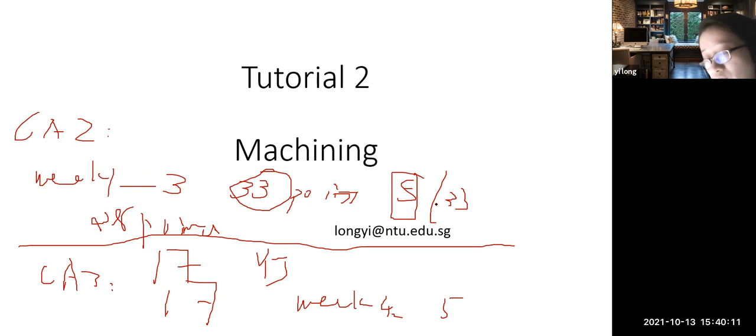Also, the other thing you have to keep in mind is don't skip any of these CAs, because no matter what, even if you're under quarantine, we still have to give you makeup. Even if you have an MC, you still need a mask, no matter what. This is a school new policy — not like before where with an MC the marks could be proportional. Not anymore, starting from this year.

Clear? Okay, so let me move on. Again, to emphasize: CA2 covers week 1 to week 3, basically until today. Also, 5 points were already given to you if you finished the LAMS sequence. And CA3 only covers the last 2 weeks, week 4 and 5.

Also, Eugene's part is going to have another half, but for what content he needs to test you, please double confirm with Prof. Yu. Clear? Okay, my part is very simple: CA2 is week 1 to 3, CA3 is week 4 and 5. Clear.

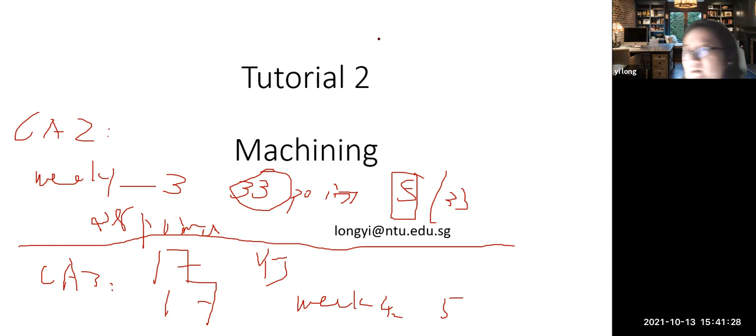Just one last message: don't skip it, there's no point. Okay, what are the operations — turning, milling, and drilling — and what machine can be used for feature 1 to 4?

So you can see, for feature 1, I just make this one's diameter become smaller; for feature 2, I make this flat surface; and I drill a hole here, and cut off to form this, starting from 200 millimeter down to 150.

Okay, so let's quickly review what we have learned. The outline for this whole course: machine introduction, so traditional material removal. We've very much focused on turning, but turning, drilling, and milling are among the most common operations here.

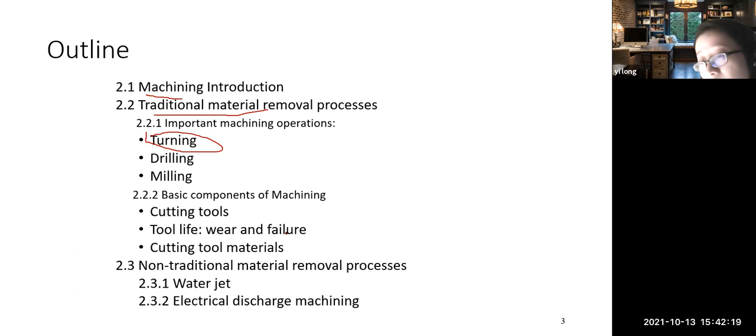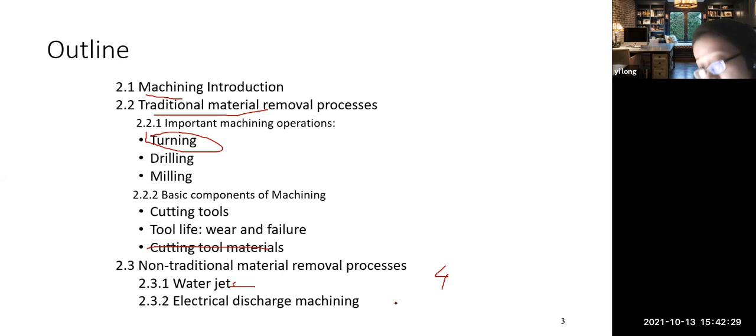So all these basic components of machining include the cutting tools, tool geometry, and failures, as well as cutting tool materials. The last portion is non-traditional machining — we have 4 types of non-traditional ways, including water jet and EDM.

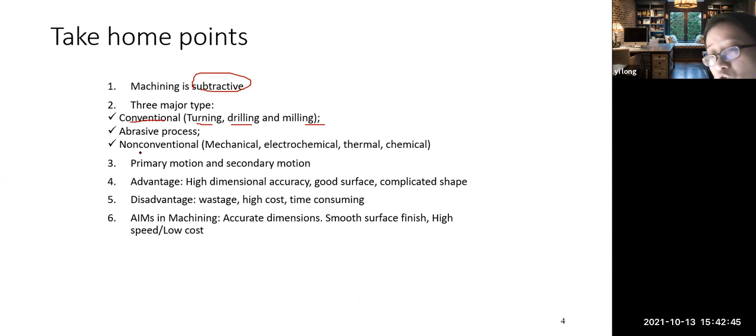So for section 1, we talked about machining as a subtractive way, and there are 3 major types: the conventional ones such as turning, drilling, and milling, but there's also the non-traditional ones, which are mechanical, electrochemical, thermal, and chemical.

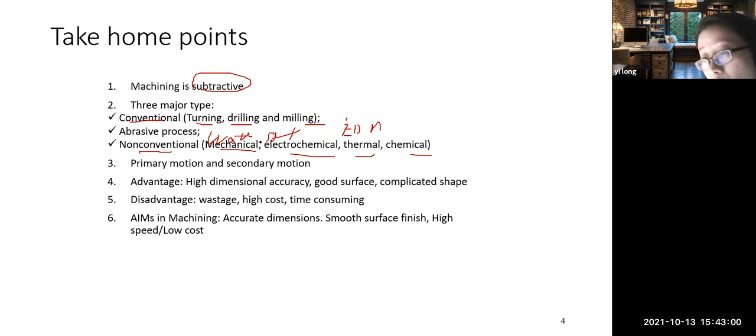We learned EDM, and we also learned water jet — water jet is mechanical, using a jet. Abrasive one isn't required, but it's actually very much used in semiconductors — they use this polishing to make your wafer very smooth, very uniform.

Also, in most machining you have 2 motions: one is the primary motion, and the second is the secondary motion. Either your workpiece rotates or your tool rotates. This helps you form certain shapes.

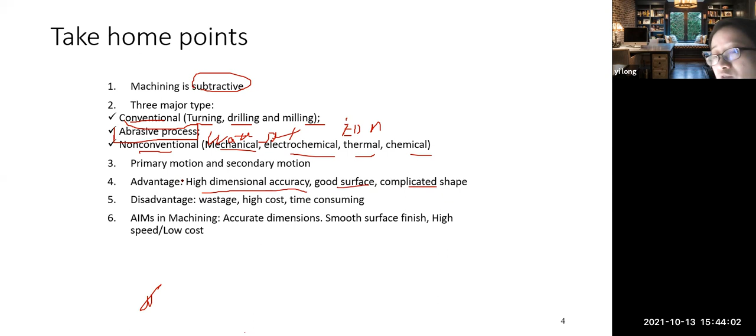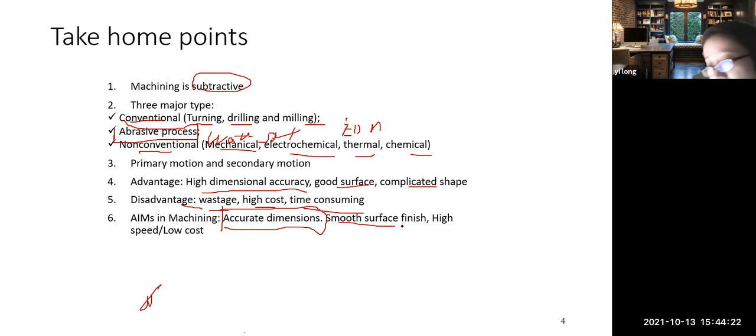Casting is definitely not the one that gives you very high dimensional accuracies, good surface finish, and complicated shapes. Normally machining gives you the best possible dimensional accuracies. The disadvantage is you have to cut away a lot of material, which is high cost and time consuming, since most of the time you drill or turn things away one by one. So our aim is always accurate dimensions with smooth surface finish, high speed and low cost.

So continuing, we talked about turning, drilling, and milling. It's basically about how the tool moves. In turning, the tool moves in this way, and drilling moves down while also rotating. Milling is also rotating because it moves and rotates at the same time. So the workpiece rotates in turning, the drill tool rotates in drilling, and in milling the tool also rotates.

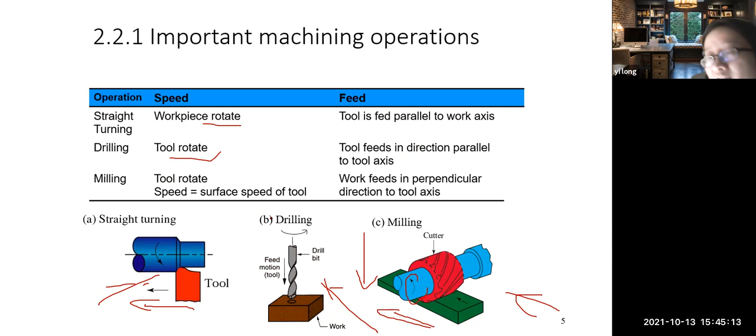The feed could be either parallel or perpendicular. Please figure all this out by yourself - you just need to remember these movements, then you can answer all these questions very easily. We have seen a lot of these movements, right?

So the various operations on a lathe - the main thing is turning. In turning you can get straight turning or taper turning, getting that taper shape, or round shape, conical shape, profiling, and also grooving. All sorts of things can be done.

Facing means now, in turning, the tool moves this way, which is perpendicular to the axis of the whole workpiece. So these two are parallel, but in this case it is perpendicular - the axis is this way, but the tool works in a perpendicular way. This is grooving. So what they do is produce a flat surface at the end of the part, or give it a facing movement.

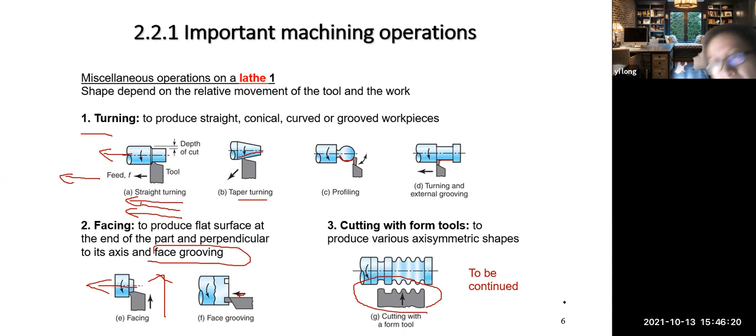Cutting with a form tool means you have a tool with a specific form, and you're going to replicate that tool form into your workpiece. And boring - the name says it well - is used to enlarge a hole or cylinder cavity, or to produce internal grooves.

Drilling, as we said before, can be done on a drill press, but also on a lathe. If the drilling is like this, it can also be done there. Parting means getting rid of everything - cutting it away. Threading is to produce external or internal threads. And knurling gives you what you've seen on knobs and handles - a little friction to make it easier to turn.

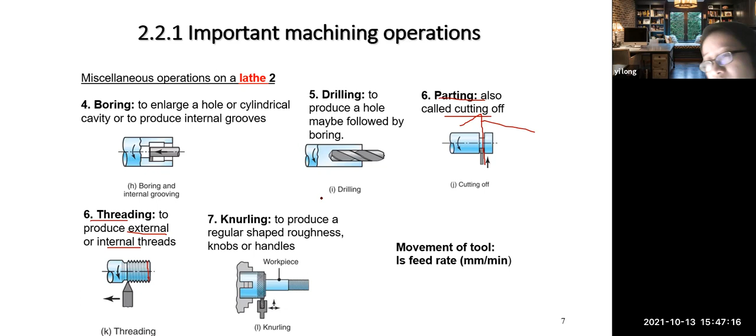So these are 7 quite standard and common operations on a lathe. There are more, but I've just summarized a few here. So let's go back to our question.

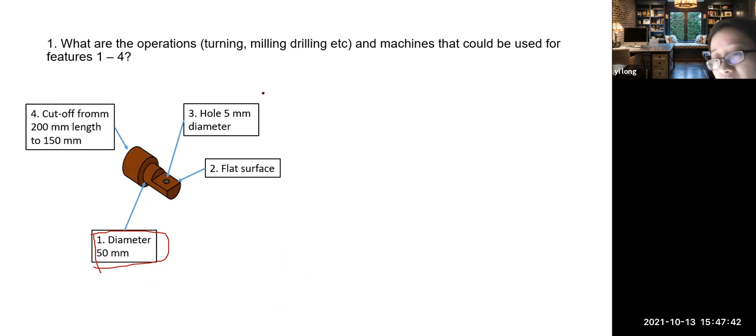So what's the first one? Tell me, can you write down your answer? The first one - turning, correct. How about the second one - this one, what is it? Excellent. Third one, easy - it has to be drilling.

Anyway, so for the fourth one - yeah, parting, part of turning, but they have a specific name for it, which is parting. Parting means getting rid of it - cutting off from 200 millimeters to 150 millimeters, so making it shorter.

So turning is done on the lathe, milling is on a milling machine where you make a flat surface, drilling is very often used on the drill press but can also be done on the lathe, and parting is also done on the lathe - parting means cutting away material. So this is the first operation.

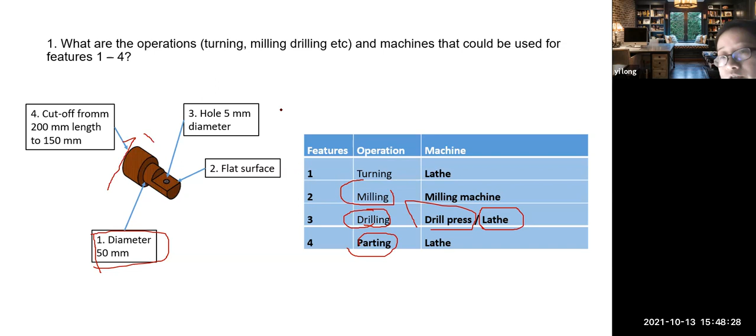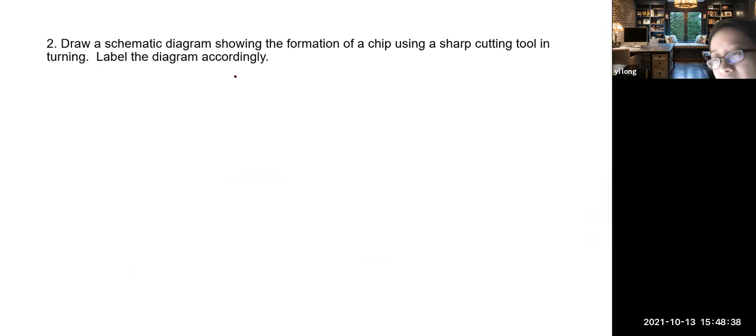Draw a schematic diagram to show the formation of chip using a sharp cutting tool in turning, and label the diagram accordingly. You've actually learned this already, so we just simply copy it - but it's pretty important here. So in the cutting, you can see where the tool is - this gray one is the tool, and this is the workpiece. So the tool has two faces.

So two faces. For example, this face we call the rake face, which connects with the chip, and there's a flank face which is closer to the workpiece. Okay, unfortunately all these are terminologies you have to remember. This is a characteristic of this course, there's too many things you need to remember.

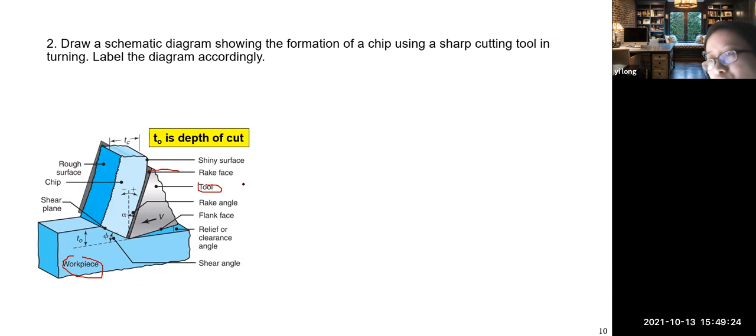But if you go to industry and you don't know this, you'll just make a fool of yourself there, right? So just try your best to learn it, to remember it. So we have the cutting tool. Simply just this line here, you can imagine this whole thing.

So behind it, the cutting tool separates the chip from the parent work material. So the rake face, this is the rake face, which is this face. And also the flank face connects with this one. In the end, you have something like this, so this is your cutting edge.

So this is your cutting edge. Okay, so this surface is your rake face, and this surface, the below one, is your flank face. Rake face and flank face. These two faces are connecting, intersecting at this cutting edge.

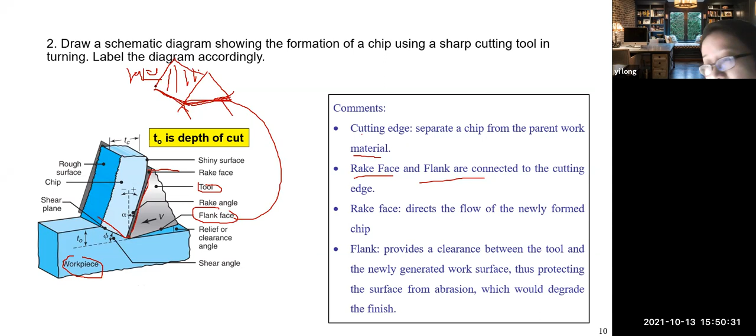The cutting edge is used to separate the chip from the parent work, and the rake face directs the flow of the newly formed chips away. And the flank provides the clearance - you can see there's a clearance here, between the tool and the newly generated work face. This protects the face from abrasion. So that is this diagram.

The others maybe no need to know, like shear plane, rough surface, and the shear angle, shining surface - no point, that's only mentioned here. You need to remember, and also chips, of course you need to know where the chips are.

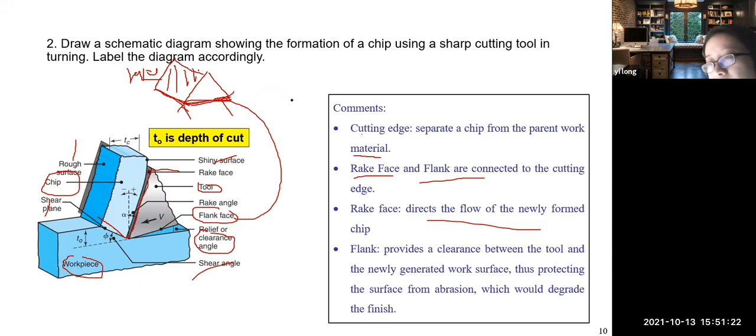Okay, so that is the tool. Draw this diagram and show the formation of chip using a sharp cutting tool in turning. Okay, so then this Taylor equation again.

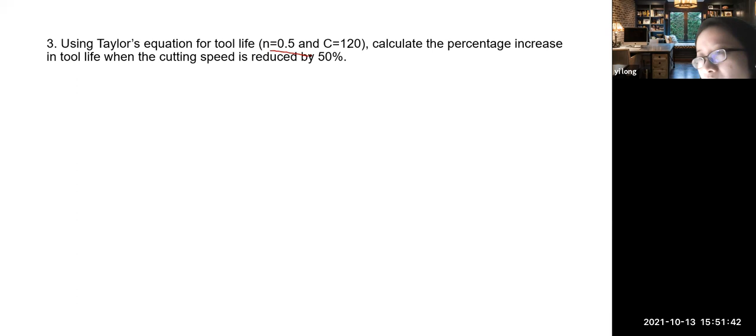This week the calculation is super simple, too simple. Use the Taylor equation, because we normally call this an empirical equation, so normally they're very easy. Use Taylor's equation for tool life, n equals 0.5, c equals 120, calculate the percentage. So can someone give me your answer?

Clarence, what's your answer? Have you done it at home? Jihao, Josephine, Junior, Hao Ying, Eugene.

Okay, 400, let me see. The question asks for increase as a percent, so please read the question carefully - percentage increase. Okay, let's see it together.

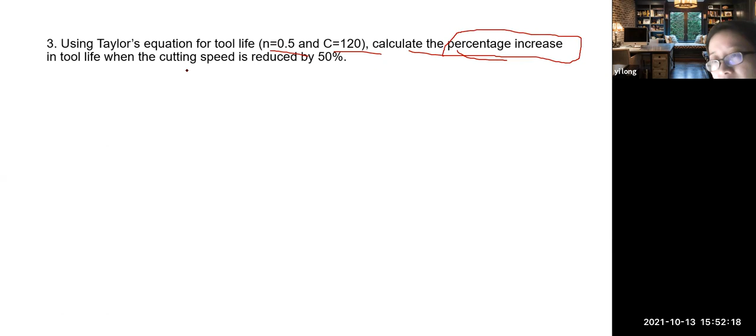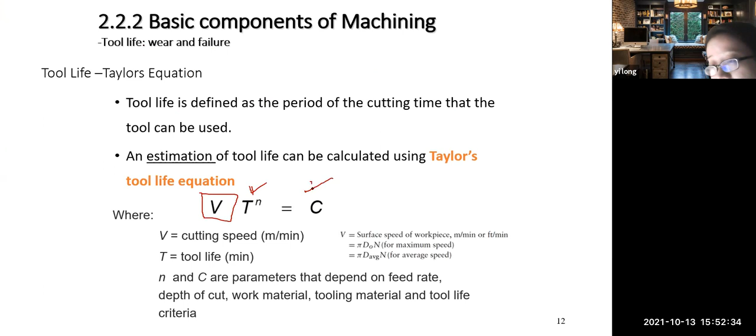First of all, use that equation. Remember, this is a big V, which is cutting speed - later I'm going to say this again. And T is time, is tool life. C, you can see it's a constant. So you simply just use this simple equation, V T^n equals to C. So V is cutting speed and T is tool life.

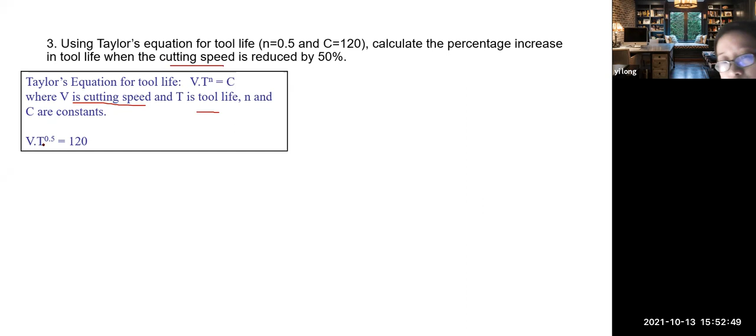So for this, we have two different cutting speeds, V1 and V2. When the cutting speed is reduced by 50%, the relationship between V1 and V2 will be half. So V2, after the reduction, is going to equal 0.5 V1, okay?

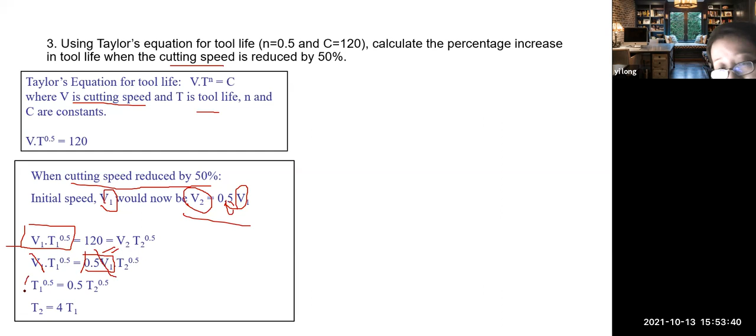So we put everything in. This is before you decrease the speed: V1 T1^0.5 equals to V2 T2^0.5. Then you substitute this V2 using this equation, so V2 equals 0.5 V1. Then you get rid of V1 here, so in the end you have T1^0.5 equals to 0.5 T2^0.5. Then you put a square on both sides, and in the end you get T2 equals 4 T1.

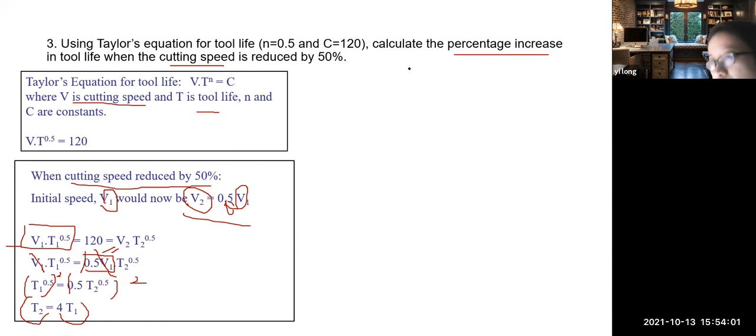But my question - I think this is the only possible mistake, that's why I asked for your answers. The question is asking for percentage increase, which means every time we talk about percentage increase, we have to use T2 minus T1, divided by T1. If you don't compare with anything, how can you say percentage increase? We compare with something, for example you compare with A - how can I say I compare with A?

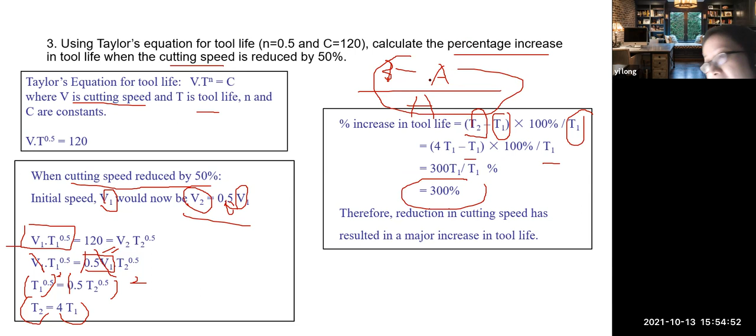What is the percentage increase? It is always B minus A divided by A. So this one is percentage increase. This is only possible mistake. So it will be 300. So with 4T1 minus T1 divided by T1, it will be 300. This is just something more often used in industry and also academia. Every time people talk about percentage increase, you have to minus the benchmark and divide it by the benchmark. So in this case, the benchmark is before you decrease the cutting speed.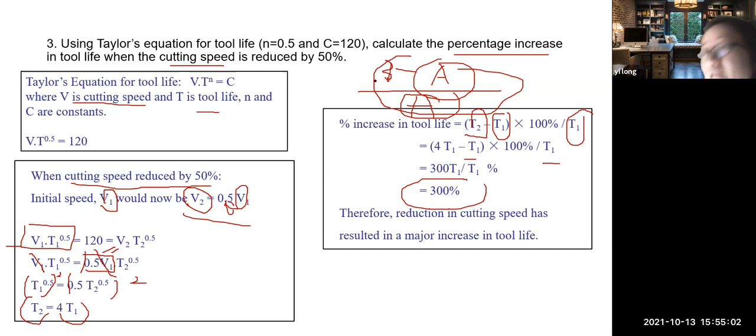So this is the third question. Now you can see if we reduce the speed, which means our tool life is going to increase. But I'm asking you brainstorming questions. Please just input your thoughts here. It's not like there's a standard answer, but just please discuss it. Since we said tool life can be almost infinite at low cutting speed, would you then recommend that all cutting be done at low speed? Please input your thoughts here. Can you type your answer? I mean, not even an answer for this one, we just discuss. Can you input your thoughts here?

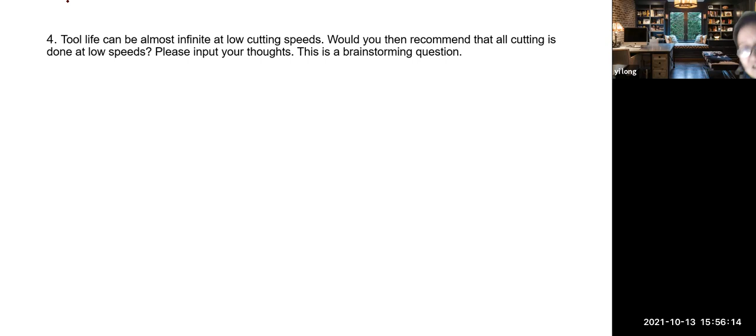Yes or no? If too slow? Oh okay, this is actually a very important point. Karen said, economic purpose, no customer can wait. Everyone wants first, correct? Okay, no production. Hao Ying also mentioned a very good point: could produce poor surface finish. Excellent, Hao Ying, wow, very good, very good, very good. Yeah, excellent, time consuming, correct. Very good, very good, okay yeah.

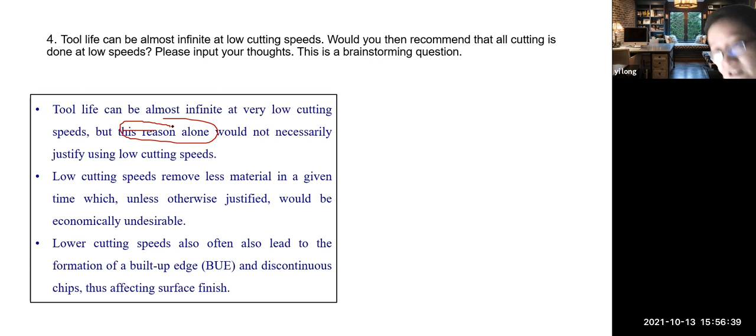So as I said, this is just brainstorming and there's no standard answer. I just suggest a few things. Tool life can almost become infinite at very slow cutting speed, but owing to this, you cannot justify it. Since you joined our school, you will be a material scientist, you're already defined as one. The only thing you might learn after 3 or 4 years of study here is that in the end, it's all about choice. There's no perfect solution. You always have to balance so many different considerations and make the best possible solution. There's no definitely very good or very bad choice, you have to justify it. So that's what we said.

But this reason alone does not necessarily justify using very low speed. Why? A student mentioned you remove less material in a given time, which unless otherwise justified would be economically undesirable, right? So it's all about money. Come on, if you cut too slow, it's too expensive.

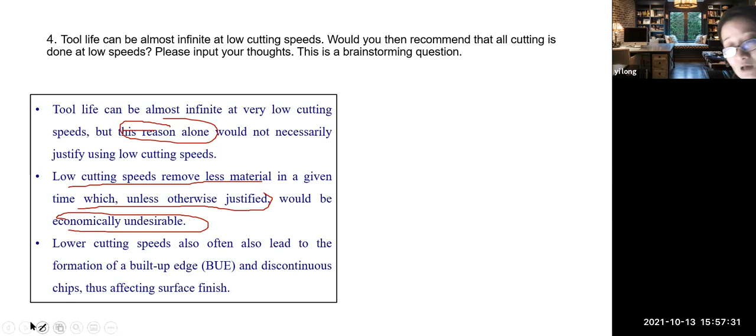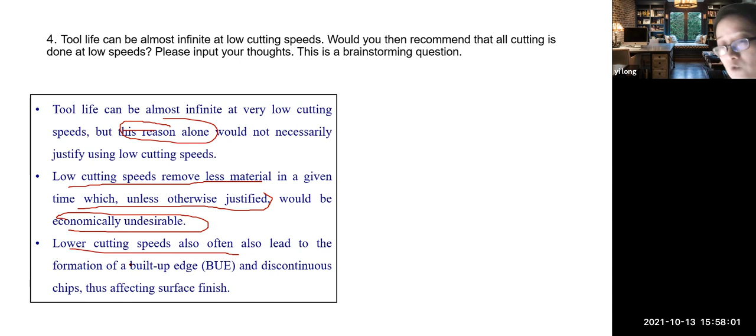And also, as the student Hao Ying suggested, lower cutting speed may also lead - this one I didn't actually mention in the notes - but this again happens: lower cutting speed often gives you the formation of built-up edge and discontinuous chip, thus affecting the surface finish. Remember what is BUE? Do you still remember, we said there are 4 types of chips, right? BUE is one of them, discontinuous is also one of them. BUE means your chip is deposited on your tool. So this is not nice because it's going to affect the roughness and the surface finish.

So this is just brainstorming. So then the question here is, in almost all the chips you have to remove, in order to remove them more effectively, what ways can you use to remove all these chips?

I think we mentioned one in class. Can you keep thinking what I mentioned in class? How can we get rid of the chip more easily? Because the chips, if they stay there forever and won't disappear, it's definitely going to influence the surface. Thank you, Yi Qing, thank you Yi Qing - chip breaker, chip breaker, okay. In the last session, one more student mentioned one thing I didn't think of.

CA2, how many questions? Can we answer this question later? Okay, so in the last session, one more student asked, is there another way, like using fluid to flush away, or brush away, or use gas? Yeah, all these are possible. The general idea is please get rid of the chips, don't let chips stay there forever. So that is question 4.

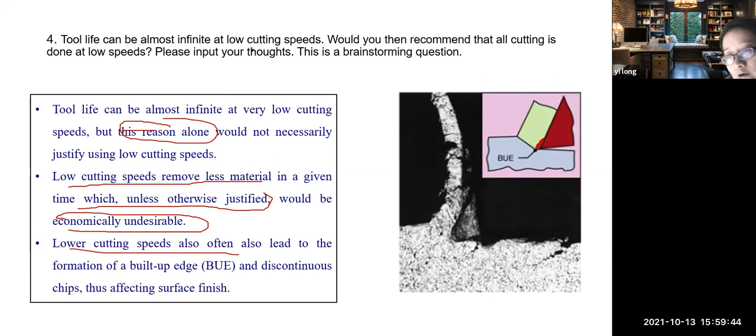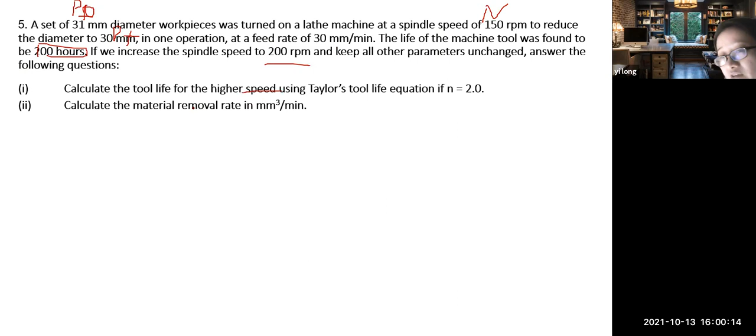Let's continue. This one is very important. You can see the material removal rate. For example, this one is a turning operation. So the first thing is this workpiece is turning.

So turn at this N. N is the rotational speed of the workpiece, in RPM, which means in 1 minute, how many rounds, how many revolutions of this workpiece are going to turn. So this is the first one.

So the feed, which is in 1 round. For example, if my workpiece turns 1 round, how far will this tool move forward? So workpiece turns 1 round, how far will this tool move forward? That is F, small f. So it's supposed to be here, right?

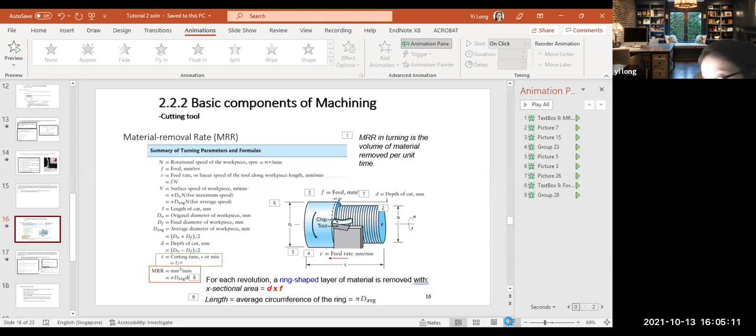Yeah, you get my point? For 1 round, what's the volume of the material you're going to get removed?

Okay, so first of all, you can see this one is moving this way, and this is turning. So first, they are going to remove more or less a ring here, this whole ring is going to get removed. Am I correct? I'm only talking about 1 round, right? For 1 round, okay, you can imagine if I turn 1 round, what's the volume of this whole thing going to get removed?

So first of all, you need to know the cross section of this one, right? So this cross section is here. The cross section is going to be D times F. Yes, D times F, okay? So that's the cross section. So D times F is going to be the cross section, okay?

So which means you're going to produce a ring, this ring, which is D and F. For 1 round, so what is the length here? Sorry, what is the length here? Tell me. Circumference. Yeah, very good.

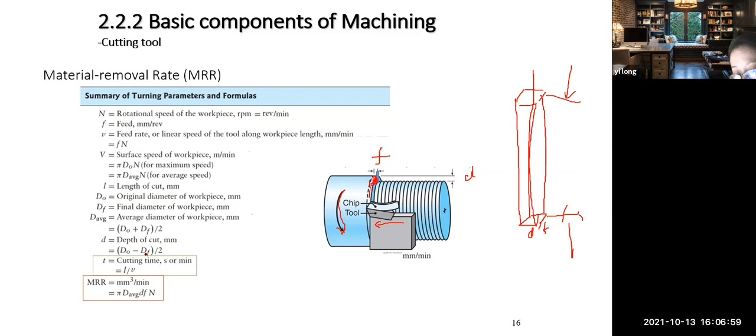The circumference, correct. So this length is supposed to be the circumference. Okay, good, very good. So that's what we put here. Because it's a bit messy.

So for each revolution, for each round, a ring-shaped layer of material is removed with cross-sectional area, first of all, D times F. F is the feed times the depth, right? Then, of course, we know for 1 round, you are going to remove the average, which is the average circumference of the ring, which is pi d, right? So that is going to be the volume removed for 1 round.

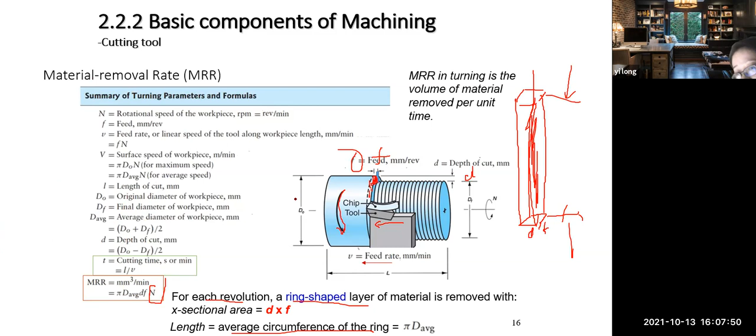Then my question is, in 1 minute, how many volumes are you going to remove? So you simply just need to times the n here. Okay, so that's the MRR. So if you see very clearly, everything is very explainable. It's just all these things. If I examine you, I'm going to give you the table, so no worry.

So let's continue. A set of 31 millimeter diameter, which means this now is D. This starting D at the very beginning. Okay, this big N set - is this big N or small n, according to the table? Big N, right? To reduce the diameter to 30, which means this one's D.

So in one operation at feed rate, the feed rate, which is 30 millimeter per minute. So what is this feed rate? Can you tell me? Check the table. So this feed rate is what? Feed rate is where? Feed rate is this one. Feed rate is this, small v, small v.

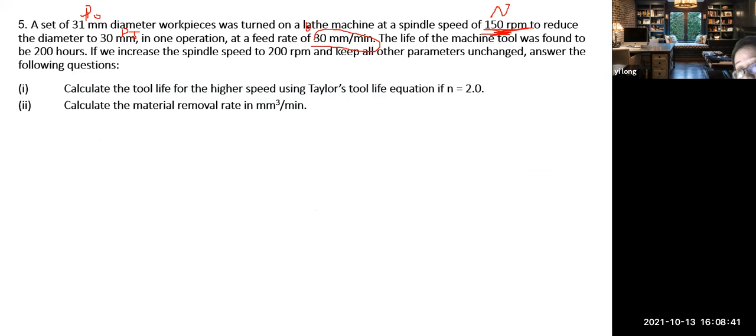Okay, so small v. And the life of the machine was found to be 200 hours. So now if I increase the spindle to 200 RPM, keep all the other parameters unchanged, answer the questions. Okay, the first one is very easy, right? This one's very easy.

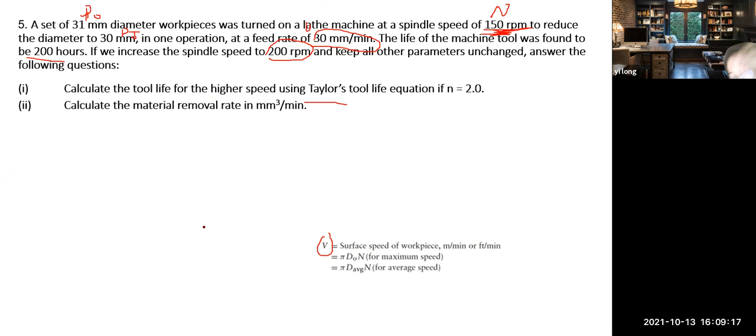Okay, so the thing is in the Taylor life equation, you have to use, it's not the small v, you need to use the big V to calculate. Big V, which is the surface speed of the workpiece in 1 minute - how far this surface, the tool moved on this workpiece. So that's what we put here. So we need to use big V, not small v. Don't confuse them. Okay, big V, and the V1, V2 speed is for the turning operation.

So of course we know that V equals pi d average times n. Okay, so continue. D average will be 30 plus 31, equals 30.5. So V1 is going to be pi D times N1, and this one is also pi D times N2, 200 millimeter per minute.

Okay, so then we already know that T1 equals 200 hours, right? 200 hours, this one was given already. So actually, you just need to calculate this T2, because it's equal to a constant. Okay, so we put all the values in.

This is the average, this is N1, this is T1, this is average D, this is N2, right? Because we increase to 200 RPM, and we need to calculate this T2. So put all the things in, you can get rid of all this. So actually, it's very straightforward.

T over 200 equals 150 over 200. Okay, so after calculation, it's reduced to 173 hours. Okay, so this is a simple question. Simple question, do you have a question?

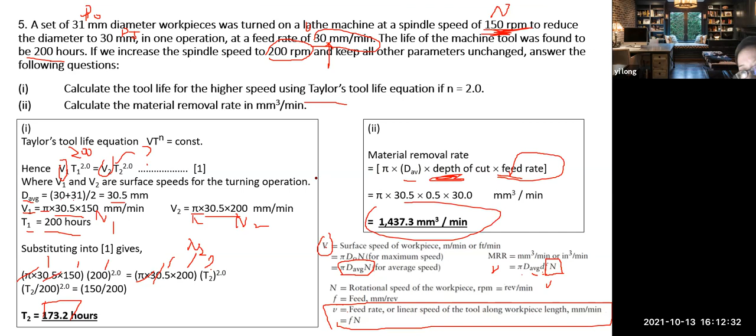Okay, so it is pretty straightforward. Okay, so that is a take-home point.

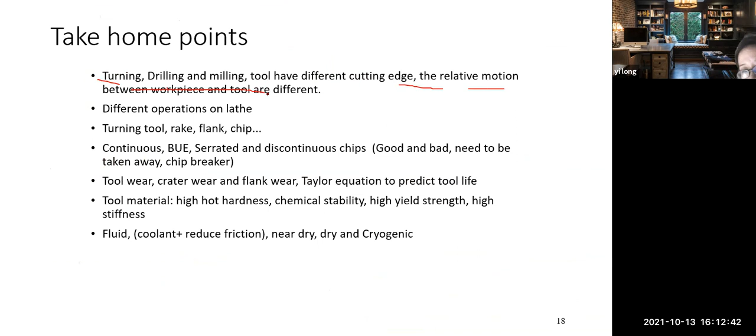So we have learned, okay, turning, drilling, and milling have different cutting edges. The relative motion between the workpiece and tool are different. Okay, and also we have learned 7 different big categories of operations on a lathe. Okay, the tool, the turning tools are - please remember all this, like what is the rake, what are the flank, what are the chips, okay? All these are very often used. People talk about all day if you work in industry.

So continuous, BUE, serrated, discontinuous, all these are chips. So all these chips are good and bad, okay, so but in general, in principle, please take away all of them. Don't just leave it stay on your surface. That's very bad, okay? So you can use a chip breaker. You design a chip breaker to remove the chips.

Okay, and also when we talk about wear, we have tool wear, including crater wear and flank wear, and also we use a Taylor equation to predict tool life. Okay, so tool materials: you have high hot hardness, chemical stability, high yield strength, and high stiffness.

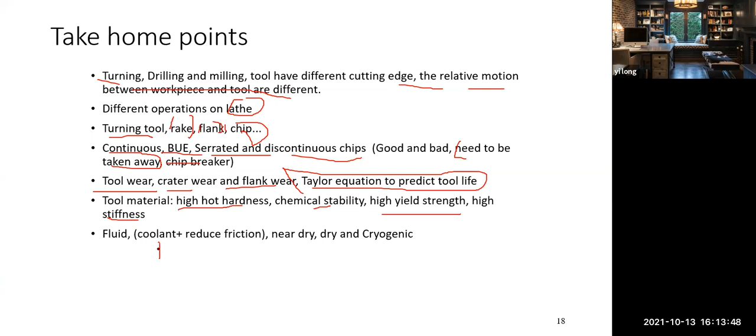And since we said we don't like the surface to become too hot, so you have fluid to do a few things. Number one, you can use it as a coolant, right? Coolant, and also you can reduce the friction. But this has problems, okay? This method has problems because you're going to cause a lot of environmental pollution. That's number one, and also it's costly, right? You need to use fluid to remove, so it could be very expensive.

So that's why nowadays there are some new trends in this whole industry. People use near-dry, and also cryogenic ways, okay, to act as a coolant and reduce friction functionalities.

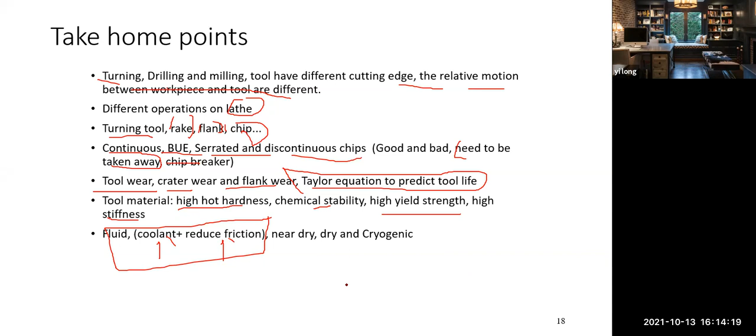Okay, and also last one, I think the last section is so simple, right? So I saw it's too simple, so there's not much you can talk about. Okay, explain the working principle of EDM. So what is the possible surface damage? So first of all, what is the EDM?

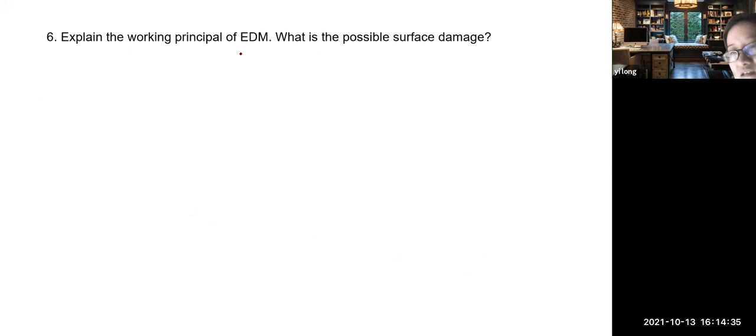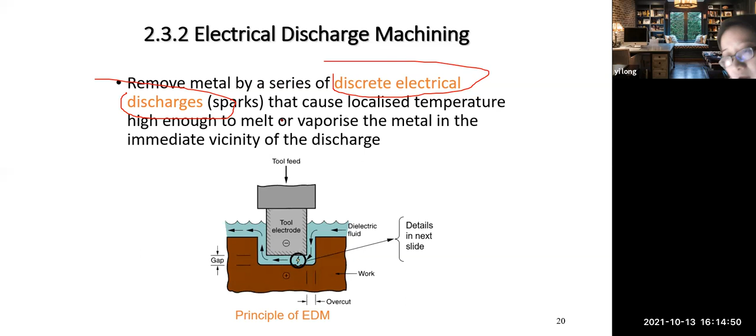So EDM, we say, okay, the keyword is discrete electrical discharge. So basically just a spark. So this spark is going to have very high temperature and can melt or vaporize the metal in the vicinity of the discharge. Okay, so if you see a little bit more carefully here, you can see.

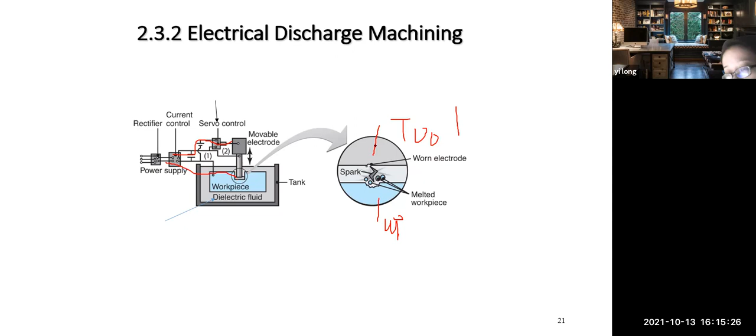So this one, it is workpiece. This is workpiece, and this is tool. Okay, so both are connected with the electrode. Okay, so which means then you are going to have a high potential in between, right? High potential between, you can see. So both of them, the movable electrode also connected with current. So this one also connected with current. Okay, so all these things, then once its potential is high enough, potential between the tool and the workpiece is high enough...

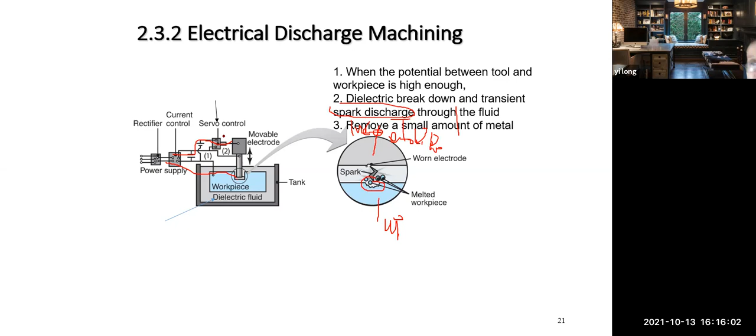then you're going to have this, we call it a dielectric breakdown. So this dielectric breakdown, then you're going to have this spark discharge. The spark discharge is high temperature. It's going to remove - I think it's better you use melt or evaporate. Melt or evaporate, I think in the answer I better change it to evaporate or melt away a small amount of this. You can see all these things are going to get melted. Okay, simple, right? Is it simple? Actually, the whole section here is pretty simple.

And also, what is the function of the dielectric fluid here? So, number one, it can act as an insulator between the workpiece and also the tool. And this can also at the same time provide a cooling media, and also can even be used as a flush. You can just flush debris in between the gap.

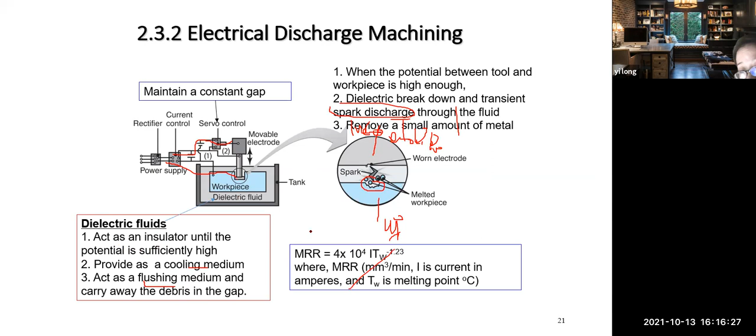Okay, so that is MRR, we didn't really talk about it. Okay, and okay, so that is the answer. Okay, so maybe later when I provide the answer, I'll change this 'remove' to a more precise word, like 'melt or evaporate.'

When the potential between the tool and the workpiece is high enough, dielectric breakdown occurs and causes a transient spark discharge through the fluid. This has high temperature and melts or evaporates a small amount of metal away. The issue is that you have to use melting, so obviously you're going to have very high temperature.

So the thermal effect is also called the heat affected zone. This heat affected zone is going to change the hardness and ductility. This is actually from last year's tutorial passed down by the previous lecturer, but you just remember all these keywords. So what's the problem with the heat affected zone?

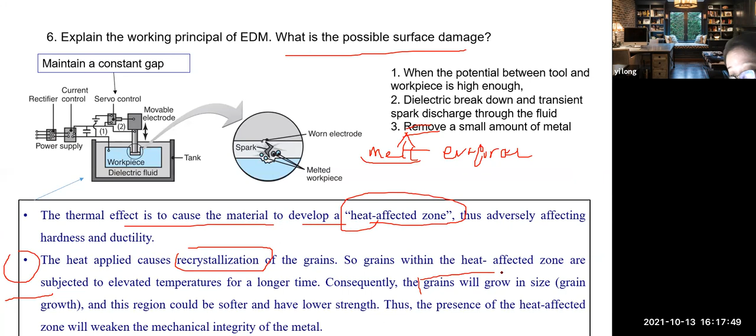Number one, it may cause recrystallization. In this case, the grain most likely is going to become bigger. The grain will grow bigger. This is a little bit more or less like annealing, which you must have learned in other courses.

If the grains are under higher temperature, the grain normally will become bigger, the grain grows, and then this region will become softer and have lower strength, because in most cases bigger grains result in lower strength and softer material. So these are the keywords here: the presence of heat affected zones weakens the mechanical integrity of the metals.

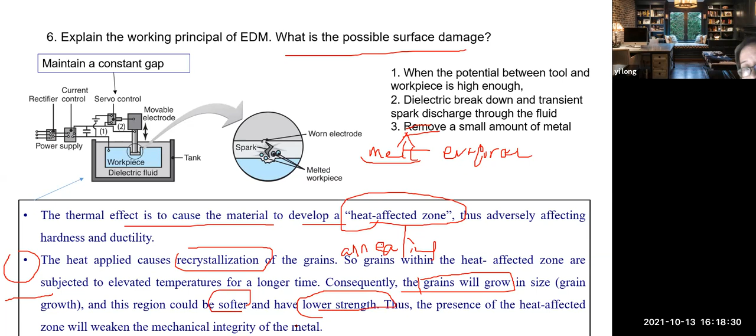That is question 6. I think this week actually is very simple for me. If you see me next year, I'm teaching Year 3 another course, and there's so many math manipulations there. For this course, you have to memorize. As I said, unfortunately, some students asked questions. I'm also teaching 3011, and there are so many equations there, a lot of math manipulation, but this course is nearly zero, not much.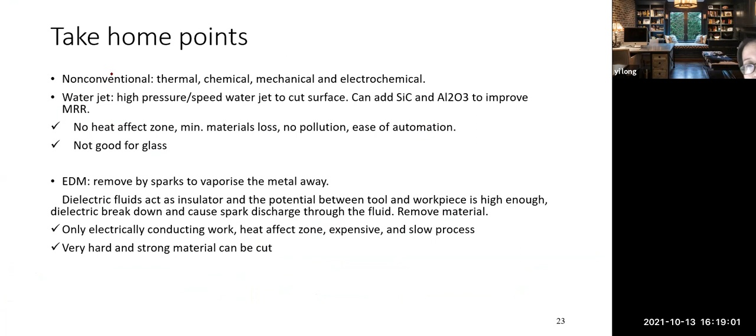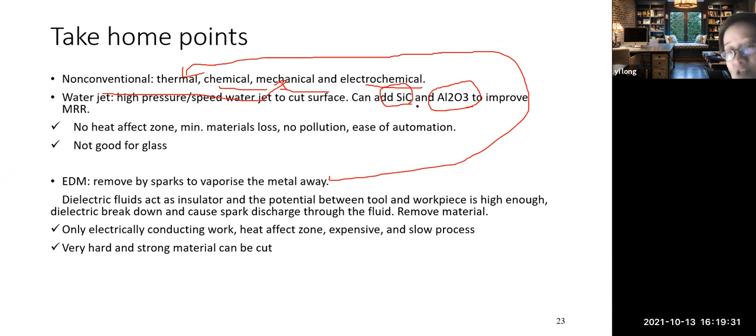Anyway, for non-conventional machining we have thermal, chemical, mechanical, and electrochemical. Water jet is this one, EDM is this one. Water jet uses high pressure, high speed water jet to cut the surface. Some people still use abrasive powders like silicon carbide and alumina to improve the MRR, meaning it can remove material faster. The good thing about water jet, since it's water based, is there's no heat effect zone, material loss is minimum, and there's no pollution since it's water, and it's easy to automate. But in this case you cannot use it for glass because it's very easy to get cracked.

For EDM, EDM uses a spark to vaporize the metal away. We have dielectric fluid acting as an insulator; when the potential between the two becomes too high, dielectric breakdown occurs and causes spark discharge through the fluid, removing the materials.

Since you need to apply voltage on both the tool and workpiece, only electrically conducting materials can get melted, am I correct? Otherwise you cannot connect with the electrode. So that's one of the limitations, only electrically conducting materials can work. Also, since it's melting, you always have this heat effect zone, and it's expensive and slow.

The good thing, compared with other machining methods, is it can be used for very hard and strong materials, because this has nothing to do with mechanical properties anymore. It's just heat up and melt. So no matter how hard the material is, if it can get melted, that's good enough already. It's nothing to do with the mechanical properties of the material, so very hard and very strong materials can be cut this way. That is the take-home point.

Actually, I think for the last two sections' take-home points, I didn't give you the answer, right? Don't worry, so you come to the tutorials, otherwise you will never come to tutorial. I'm just joking, okay. So that is all for today. I think the quiz, the CA2, is until here.